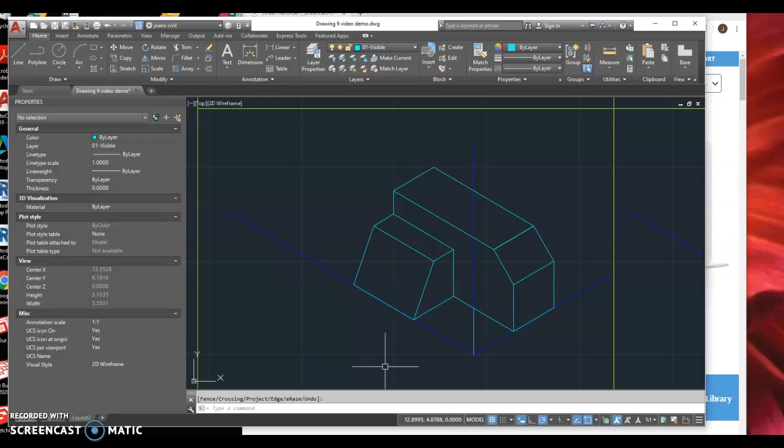I was just about done with this object. We're on the visible layer, and we just need to do a couple more lines in here. Get this edge in here. Now we're still trimming away at that outer box that we originally drew, and just checking to make sure we got all our visible lines in there. That looks pretty good, I think we have one more right here.

Looks pretty good. So now we can get rid of our projectors and go over to our frame layer. Make sure that we have geometric center only as our snap, and draw a rectangle in the lower left. Now I sort of changed my snaps too soon, didn't I? And the lower left, here, right there, and the upper right. Right there.

Now we can use our handy dandy geometric snap. We're going to select everything in the small frame using its geometric center, which is highlighted now, and then hovering over the big frame and getting its geometric center and just snapping them to each other. And that one off though.

Down to object D. So it has a front face of 5 grids, and it's 3 tall, and it's 4 grids deep. So it's 5, 3, 4.

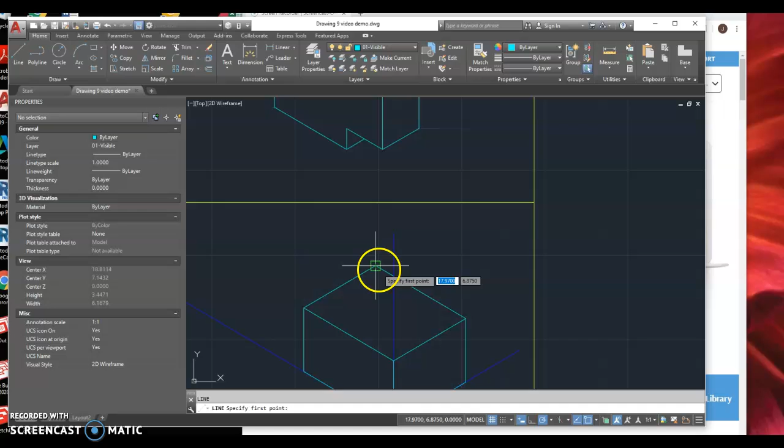So I'm going to use my line, and I'm referencing over 0.5, and then I'm coming over here, and on the angle, 0.5 and 0.5. So now I have that little top surface.

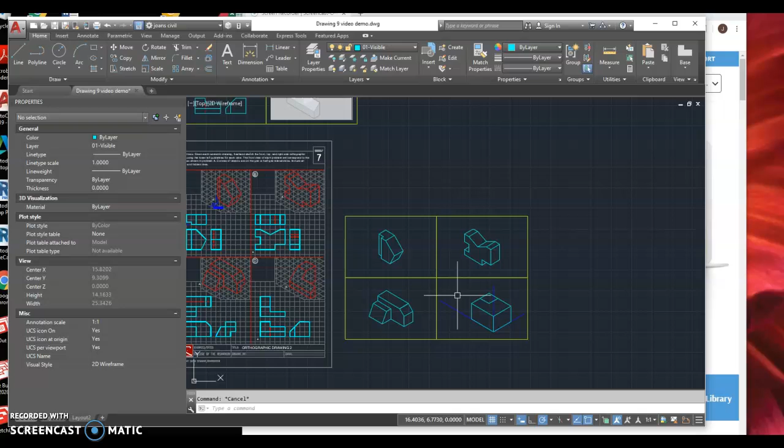And I can see that this leg from the outer box, it's going to have to move back over here. This is where it's at. It's not way out there. It's much closer in.

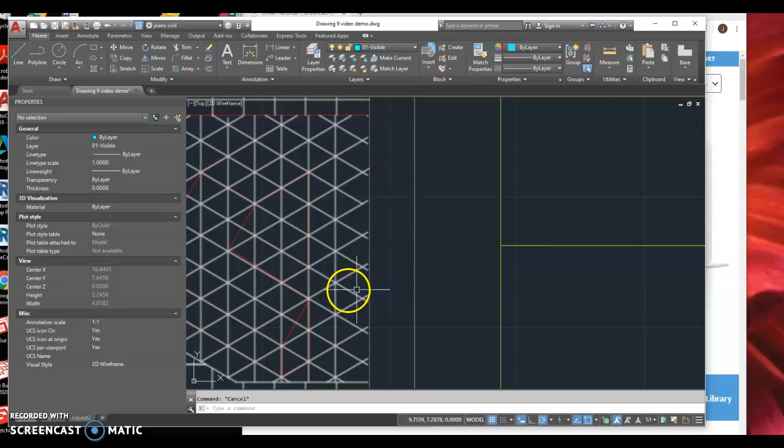And then from the top of this box, I have a foreshortened slope that goes down one grid and over one grid. So I'm just going to draw a line from here. 0.25 is the y component, 0.25 is the x component, and then I can just put that back up there and get rid of that.

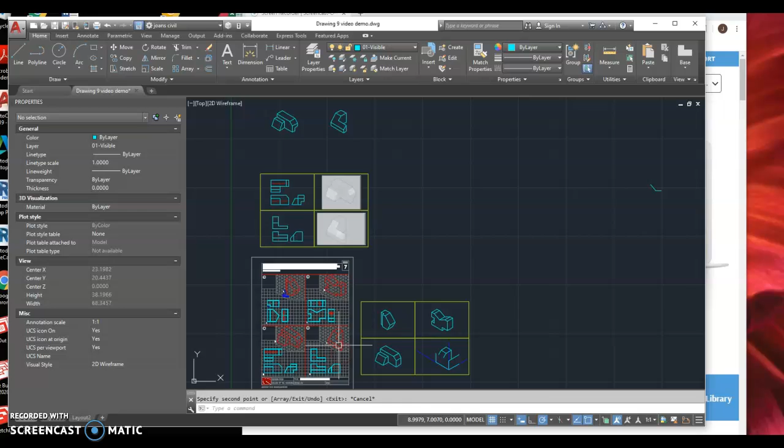So that's again, this might be throwing your eye off, this outer box. That is the visible edge that we have right there. So that's the first part of it, that's this part here, and then it continues. This one continues over.

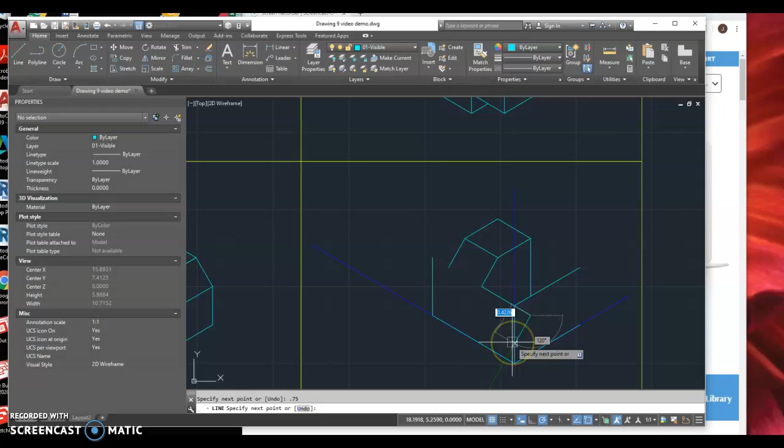Let's see, three grids. And what does it do after that? It goes over one. Again, this is possibly throwing your eye off now because we're looking at that construction box, but when we get done, this will look fine.

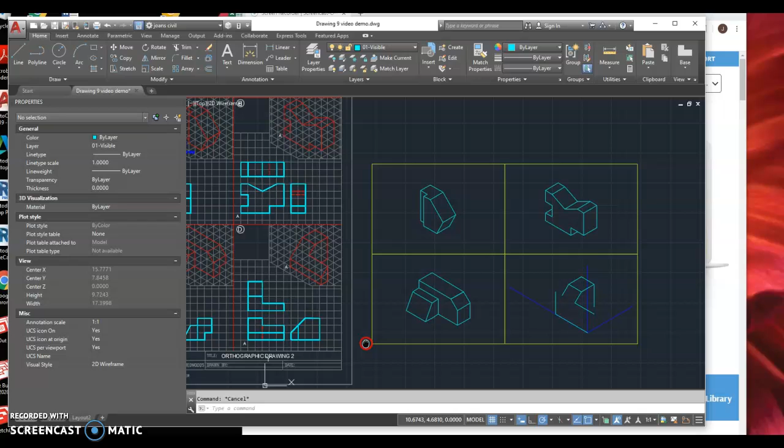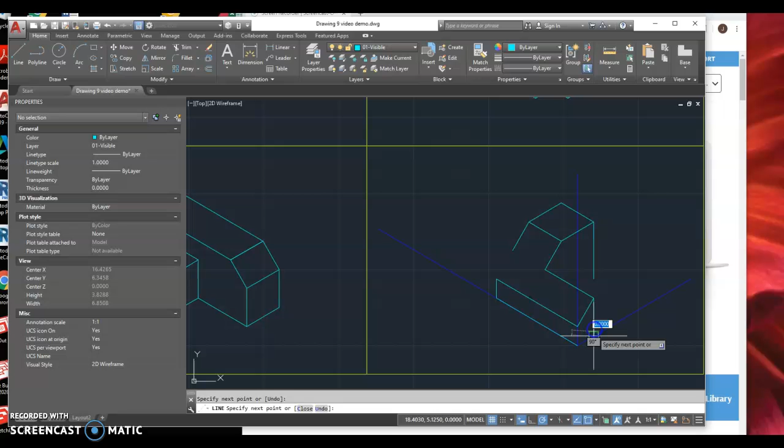We have this front edge, let's try to finish this front edge. So this one comes up here, comes up 0.25, and that's going to be the last of that corner. Now I can draw this end piece in here, which is 0.5 down, 0.25 this way, and 0.5 that way. So now I've got that.

And then copy, this is the angle. You don't really need to copy that, you can just draw it, coming this way, it's on the polar and it's hitting that intersection. It's hidden right here, there's a little bit that's hidden right there. And then this foreshortened slope actually continues down to there. So now you have all the visible lines, no hidden lines shown.

And we'll get rid of our projectors. We'll go over and grab a frame layer and a rectangle. Do our lower left. Sometimes it doesn't, just pick it up. And upper right.

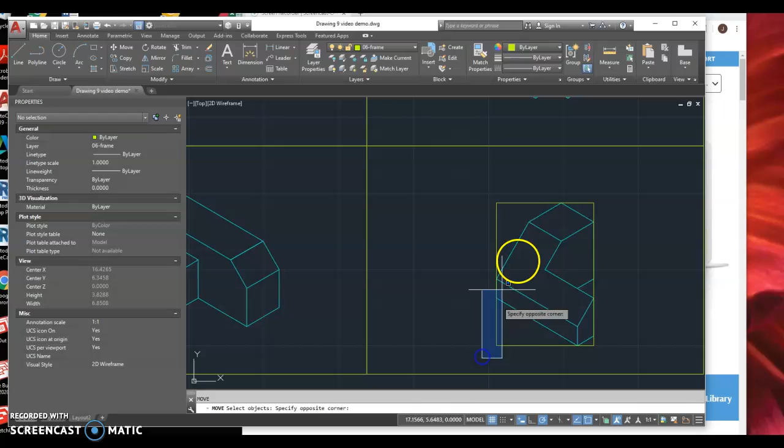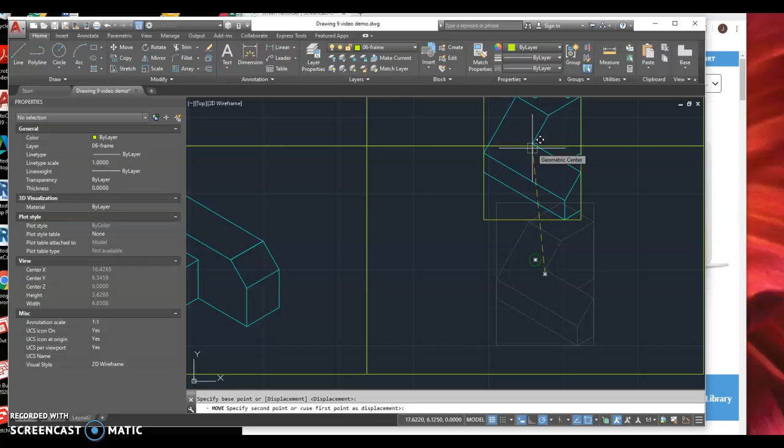Get rid of our normal snaps, get our special snaps. We use move, select objects, hit spacebar. Base point is geometric center number 1, and we're pairing that with geometric center. Now you see right here, the geometric center did not have the green circle on it, so make sure you get it once the green circle highlights on it. That means it's ready to click, and you don't have to move your cursor any further than that. You can just click from where you are.

So there we have pretty much everything drawn. So we can go over to our layout now. Now I already zoomed and centered this frame, but you would want to make sure that you went into here and zoomed this frame and then picked it back up, scaled it back up to 1 to 1, and then you can go ahead and lock it. And I always leave it like that. That is all you need for that. Of course, you would change your title and all that.